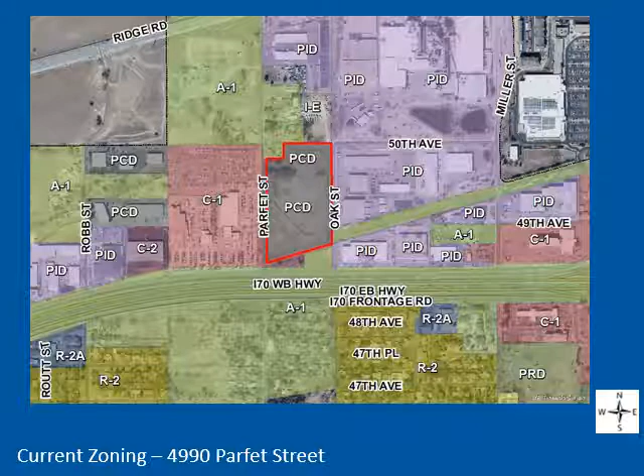As mentioned, the property is currently zoned Planned Commercial Development, or PCD. Most of the surrounding zoning is industrial. Southeast, east, and northeast of the property is zoned Planned Industrial Development. North is Industrial Employment. And then to the northwest is Agricultural 1, which contains an existing single-family home. To the west is the Medved site and is zoned Commercial 1. And to the southwest is zoned Commercial 2.

The request before you is for a rezone from planned commercial development to planned industrial development. Under the current zoning, the site can only be developed as an auto dealership, so rezoning is necessary. And because of the unique challenges of the site and proposal for a large format industrial building for which city standards do not contemplate, not all standards of the IE zone district can be met. For these reasons, PID zoning is most appropriate.

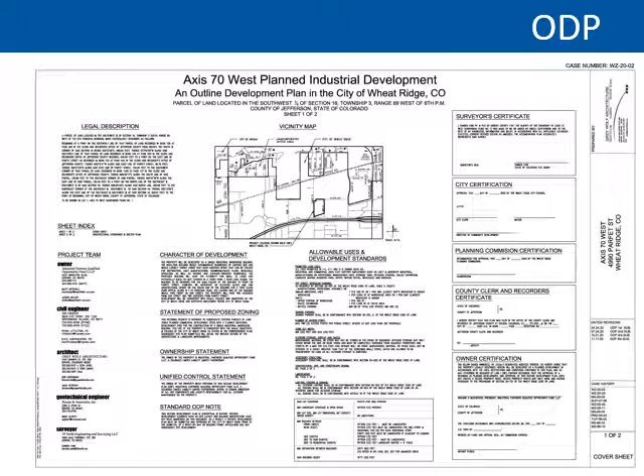We'll start with the Outline Development Plan, or ODP, which establishes the PID zoning. The ODP document is 2 sheets in this case. The first page is the cover page with certification and signature blocks. There's also a character of development statement, list of permitted uses and development standards, and other standard notes. The development standards are what we'll want to focus on here, and I'll go over that in just a minute.

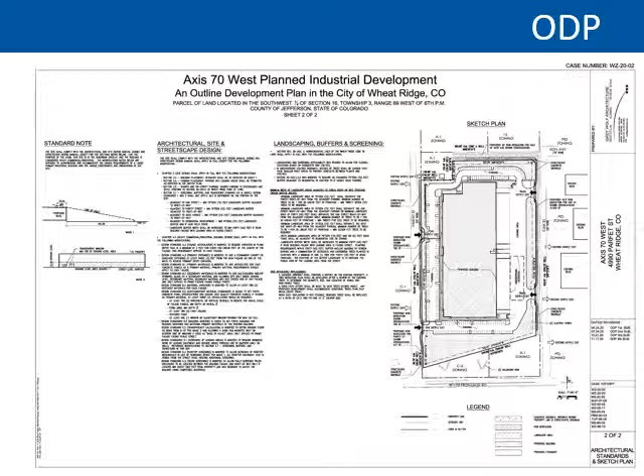The second page includes the conceptual layout of the property, including access drives and building orientation, as well as architectural standards. The conceptual layout, or sketch plan, is meant to illustrate general building locations and circulation. I'll go through each of the architectural standards with you here in a moment. As for the sketch plan, this is a required component, but we won't focus too much on it because we're also reviewing the SDP, which has much greater detail.

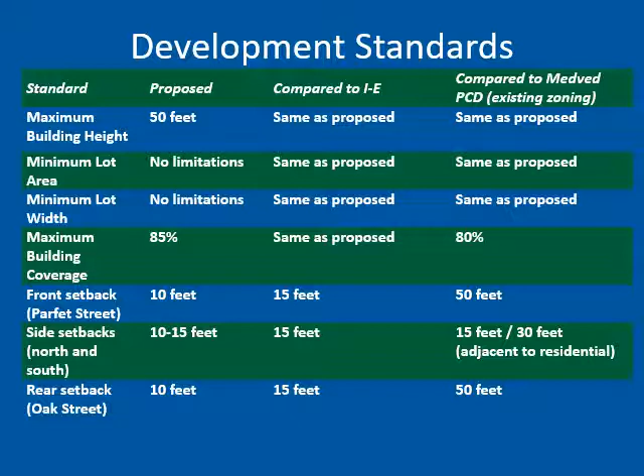The development standards on this slide reflect those that are being requested to differ from or be modified from typical IE standards. I'll go through each one with you briefly to give you some context, but you can find more details in the staff report. The ODP categorizes parking by use with a request for ultimately less restrictive parking than the standard warehouse and sales uses would require by code, and based on comparable requirements for large format industrial uses in other jurisdictions around the Denver metro area.

The applicant is proposing 2 access points per public street to align with fire district requirements, and curb cuts are proposed to be a little bit wider to accommodate truck turning movements along Oak Street. Landscape requirements are proposed to be somewhat flexible where utilities or easements exist on site, but require the typical minimum number of plants to be relocated elsewhere on site, and to focus our attention on areas of higher priority such as screening of parking areas and headlights.

Enhanced buffering is required to the northwest adjacent to the residential as well as fencing, and on Oak Street on the loading side an enhanced buffer of 40 feet is required. The ODP also requires a tree inventory and assessment of existing trees on the property to determine viability, and those that cannot be saved on site must be replaced at a 2-to-1 ratio. The applicant is also proposing a maximum fence or wall height of 10 feet versus the 6 feet typically allowed to sufficiently screen loading areas from adjacent uses.

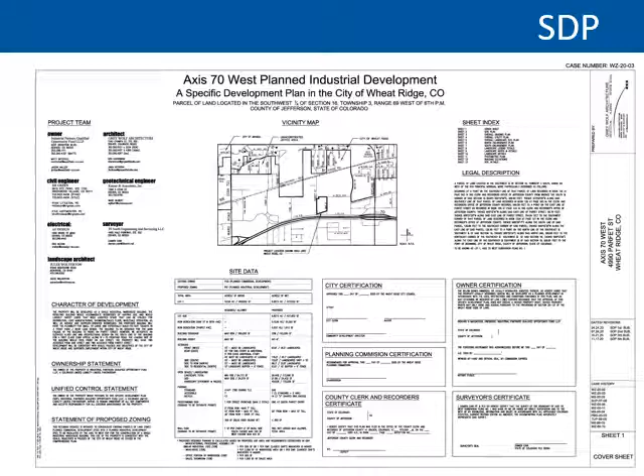The SDP is 13 pages and gets into the details of the project. The SDP has to comply with the ODP, and the cover sheet has a table that shows required and proposed development standards. The SDP is proposed to facilitate the construction of a single industrial warehouse building consisting of approximately 142,200 square feet. The resulting building is speculative in that tenants are not yet in place, but would accommodate businesses of varying sizes and largely target employment-related uses of industrial nature as allowed by the ODP.

The building is designed for the main facade to front on Parfet Street, with loading on the east along Oak Street. Property will have 2 access points from Oak and 2 access points from Parfet Street. Standard parking wraps the building on the north, south, and west sides with a truck court and loading area on the east side. Site access, parking, building height, and setbacks comply with the ODP and are compatible with the surroundings. Sidewalks will be installed along Parfet, Oak, and 50th Avenue.

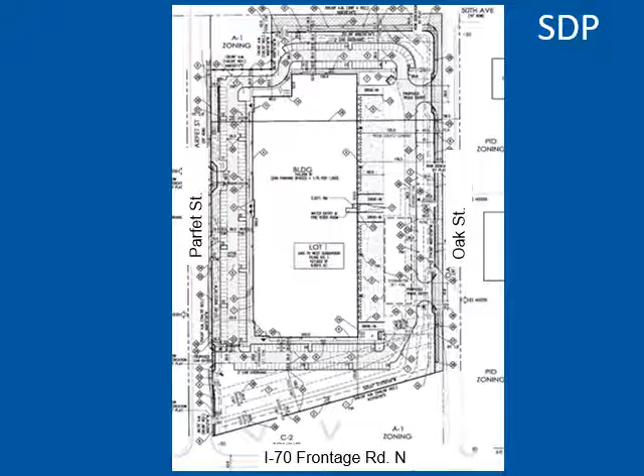The site's heavily encumbered by easements. As previously mentioned, there's a 100-foot public service company easement on the south side as well as the Ridge Road tributary. And then on the east is the Bayou Ditch, Arvada Channel, and storm pipes, all which are significant and limit development in these locations.

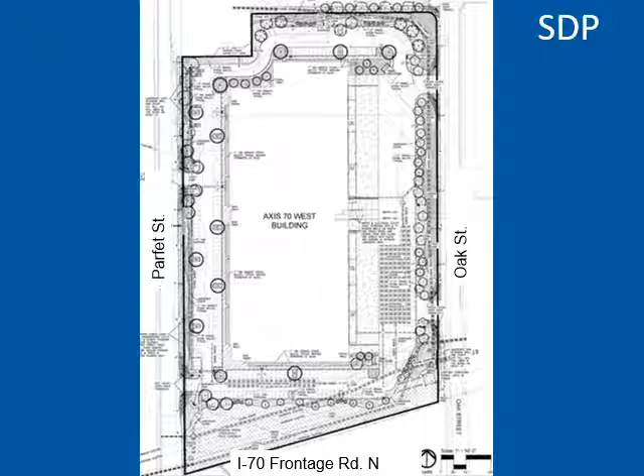This is the landscape plan for the site. The SDP proposes 26% of the site to be landscaped, including parking lot landscaping, perimeter landscaping, and a decent buffer on the south side. A total of 112 trees and 781 shrubs will be provided. A tree inventory and assessment was performed by an arborist to determine viability of existing trees on site, and all but one, and even that one was determined to not be super healthy, were deemed unviable. So with that, the applicant is proposing replacement of trees at a 2-to-1 ratio as required by the ODP.

As a requirement of the zone change process, a neighborhood meeting was held on April 21, 2020 in a virtual meeting format with 14 people from the public in attendance. Notes from that meeting are included in the staff report. Since Wheat Ridge is not a full-service city, we sent the application on referral to outside agencies as well as completing our internal review. There are no remaining concerns or objections from outside agencies. Before the hearing, the property was posted for 15 days and letters were sent to property owners within a 600-foot radius. We have not received any calls or emails to date.

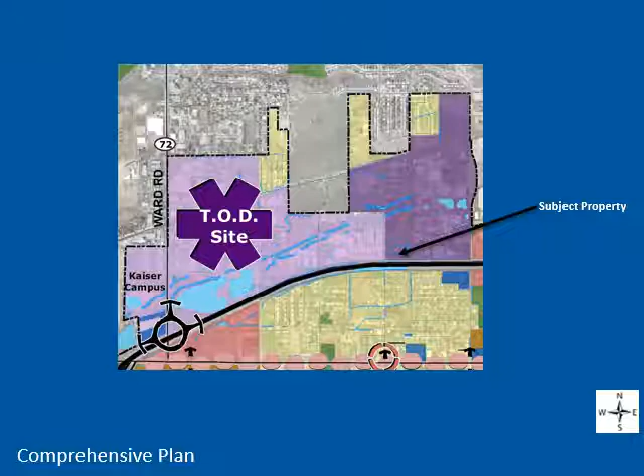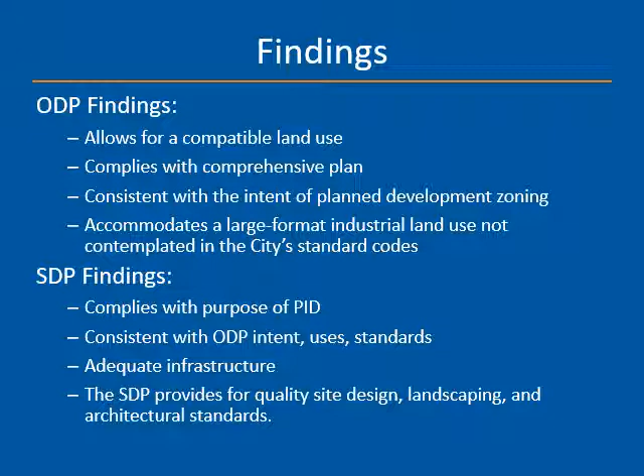Staff finds that the zone change request meets the criteria. It allows for compatible land use, complies with the comprehensive plan, is consistent with the intent of planned development zoning, and is necessary to accommodate a large format industrial land use not contemplated in city standard codes. The SDP also meets criteria for review. The SDP complies with the purpose of a PID, is consistent with the ODP, there's adequate infrastructure to serve the property, and it provides for quality design that meets the intents of our code. Ultimately, staff is recommending approval of both requests. Planning Commission will recommend a decision to City Council, who will also review both documents.